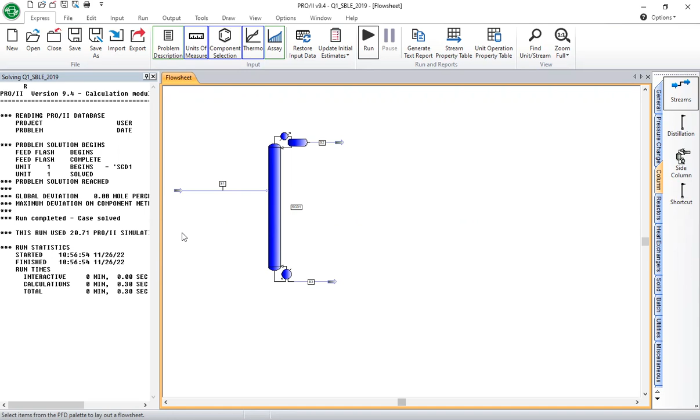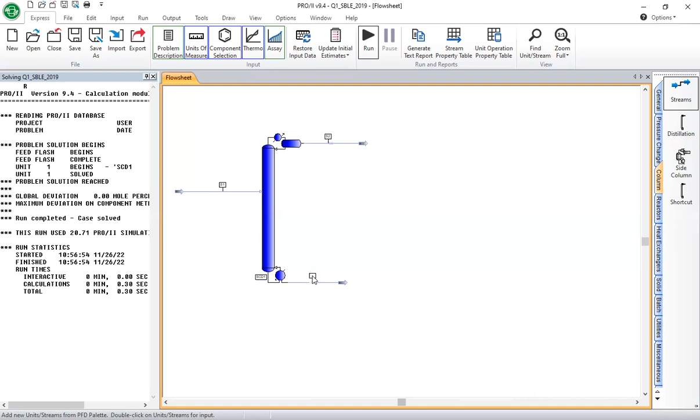So first, let me maximize this so that you can actually see this properly. Let me keep it straight. So what is happening here, I have given a stream here. So this is methanol water. Okay, let me change the units to kgs per hour. Let me actually show you another screen also here where you can see the problem.

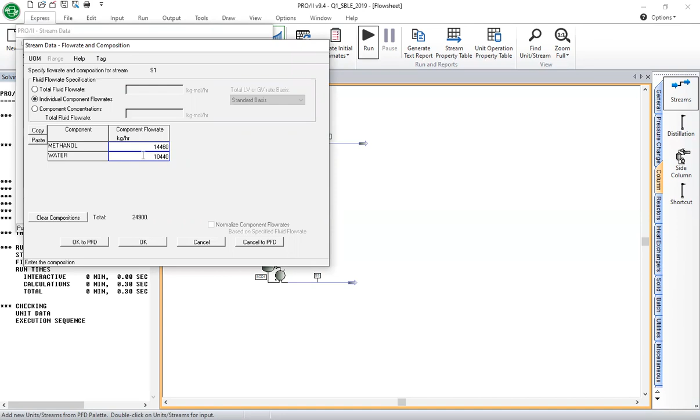So double click here and then flow rate and composition is methanol 14,460 and water 10,440 kgs per hour. This is what I have entered as the inputs. And temperature, it said it is entered as subcooled liquid. So temperature I am taking as 20 degrees centigrade. So 20 plus 273 comes to 293 Kelvin.

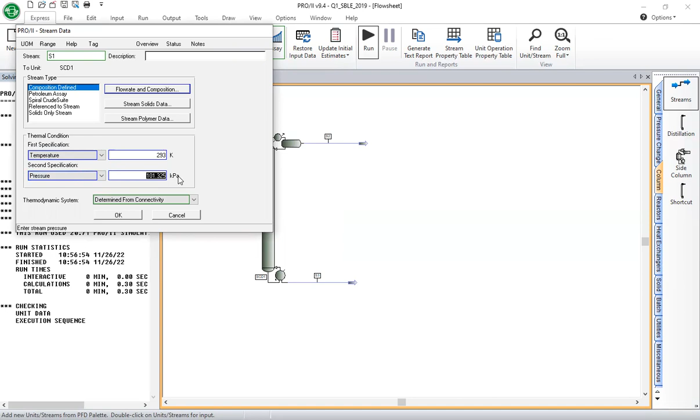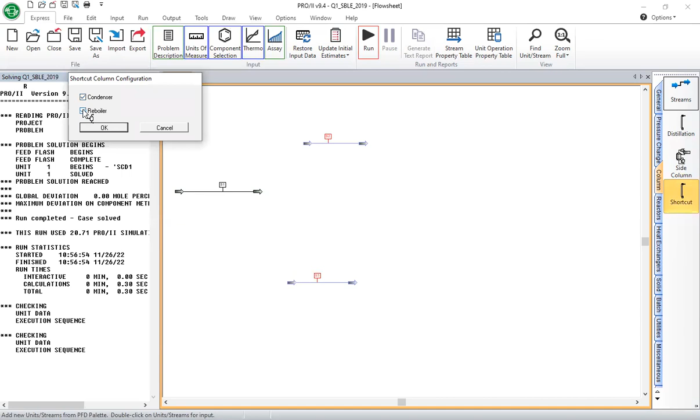So pressure is 1 atmosphere. 1 atmosphere is equal to 101.325 kilopascals. So this is my feed condition, S1. And then I jump into the shortcut distillation column. But I will show you again how to actually do it. So I've removed it. Take the shortcut distillation column and place it here. It will ask whether you require a condenser or a reboiler. If you are not taking a condenser and reboiler, it will act as an absorber.

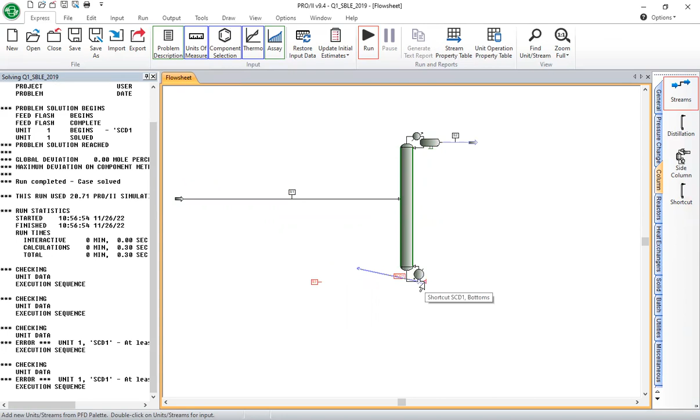Okay. Now I will connect this feed stream at the center, and then this stream to this particular outlet, and this stream at the bottom. So one caution is very important here. While connecting the stream at the top of the distillation column, that means condenser, you should be careful, because this green color is shown as water, but instead you should take this red color, which is actually a liquid.

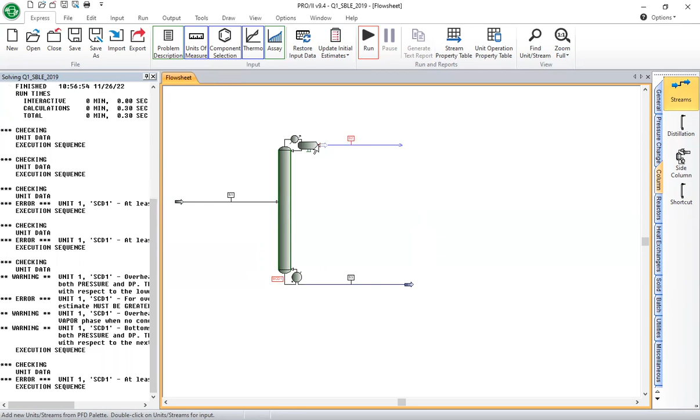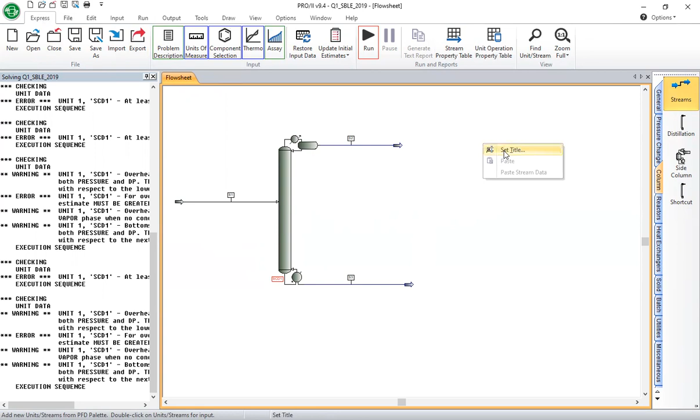We are not interested in the separation of the water, but rather in the separation of the methanol. In this scenario, we are looking at methanol and water. So this is a methanol and water problem. So methanol is the low boiling liquid and water is a high boiling liquid. And you can see the name of the module is given as SCD1, that means shortcut distillation column 1.

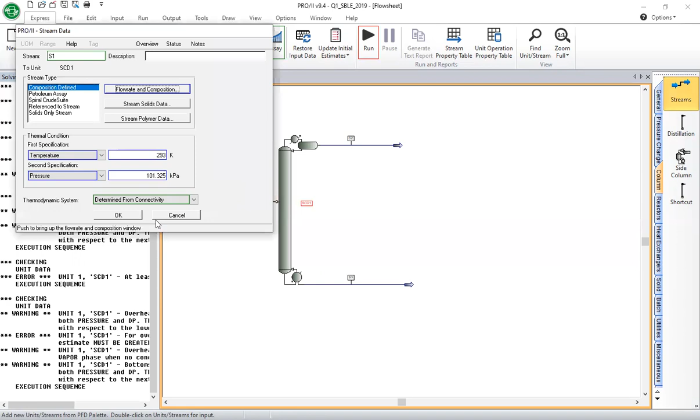Now we have to enter. I have already entered the details here. Flow rate: I have chosen not the total, but individual component flow rates. Methanol is 14,460 and water is 10,440. Okay, done. Now let me open the shortcut distillation because this is also red. Condenser and reboiler already set. So it is given as bubble, that means it is a total condenser.

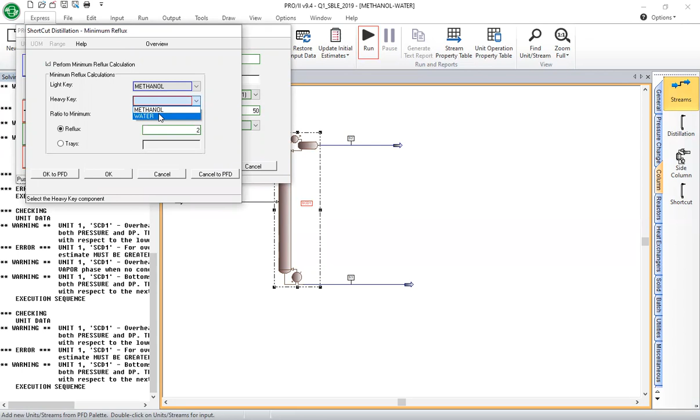Now I go to minimum reflux ratio. Light key, which is more volatile, I consider as methanol, and heavy key as water. Now R to R minimum reflux ratio, by a design thumb rule, is around 1.8 to 2.5. Let me consider it as 2. Now there are still red specifications: product specifications.

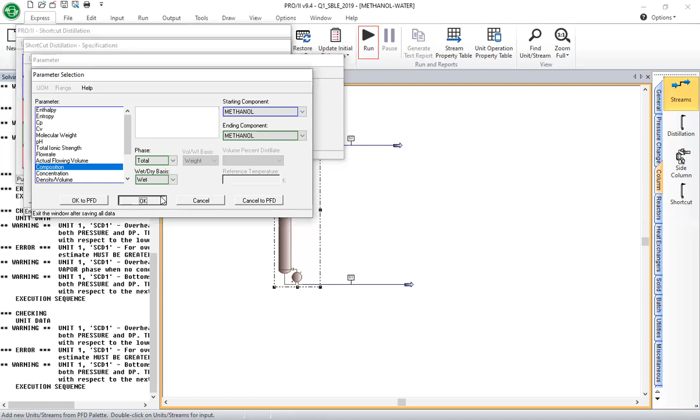The top product is stream S2. I want the methanol composition to be 0.99, that means 99%. At the same time, the bottom stream is S3. In S3 I want methanol to be very less, so I consider it around 0.1, that means 10%.

So products: F is equal to D plus W. F is feed, D is the distillate, W is the residue. You have to specify at least one, because we know the feed composition and feed flow rate, but with one equation and two unknown variables it cannot be solved numerically.

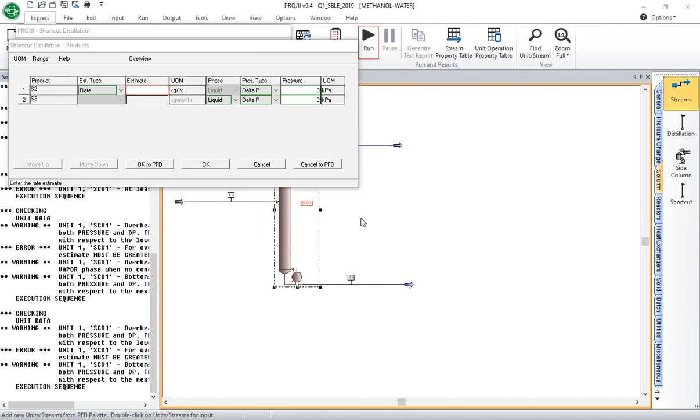So let me take it as mass. My feed contains 14,460 kg per hour methanol, and I'm saying 99%. Roughly I wish to take around 12,500 kgs per hour. This is an approximate value. All other things are blue here, and the Fenske estimates we don't have to bother with now. Now let me say okay. The input to this process flow sheet window is done.

Now let me go to the next part, the thermodynamic model. In the problem, we have to choose NRTL. First, let me delete this NRTL so that it is easy for you. Now I want to add. See, now the thermodynamic model is not there.

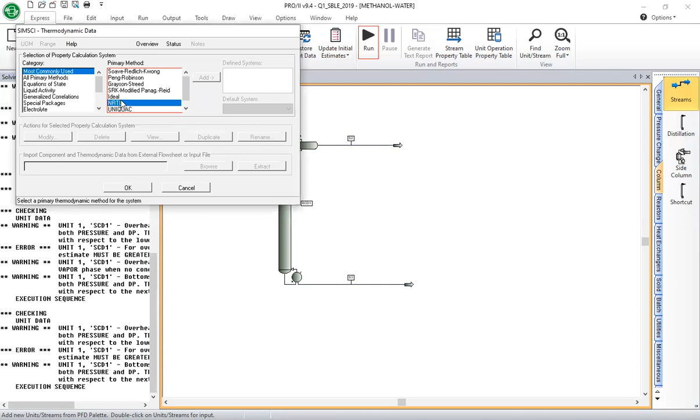Let me delete it. Delete and then okay. Now see the red color. That means the thermodynamic model is not set, because there is a water molecule. Generally we choose the most common method, NRTL, add it, then single liquid phase only, and okay. Why single liquid phase? Because methanol and water are completely soluble, so you can say single liquid phase.

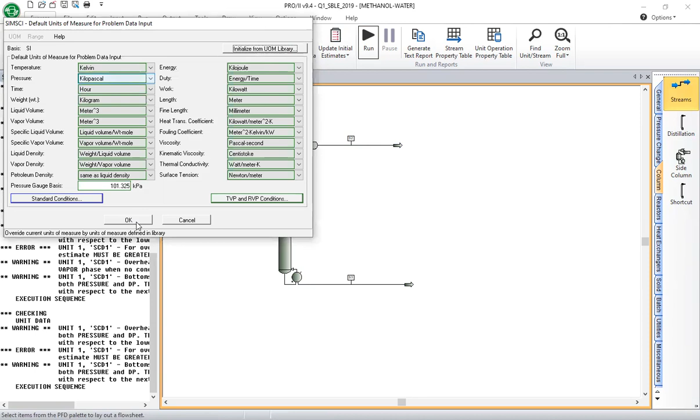Now you see here the units of measure is also very important. I have gone to the units of measure at the top, said initialize, then chose the SI metric system, and said okay. So my system is ready now. Now let me restore the data and save. Every time you change any data, please click restore input data. Otherwise, the previous results might recur and your simulation might go wrong.

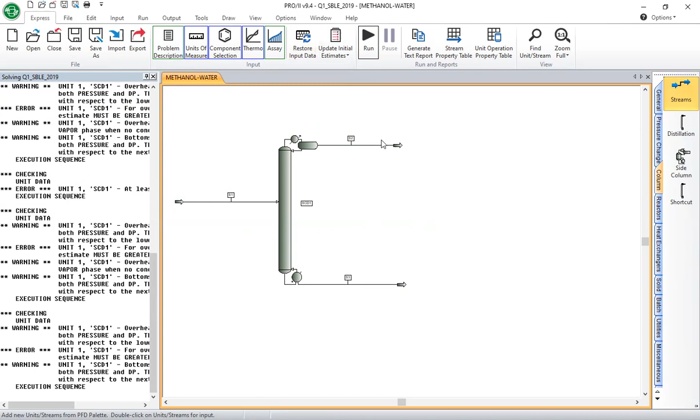Now let me go to the run button. See, now the program is run. If I'm able to see the blue color appearing in the process flow sheet window, that means every other data is correct, and my simulation is run with the given conditions. I think you are able to understand what I'm trying to say.

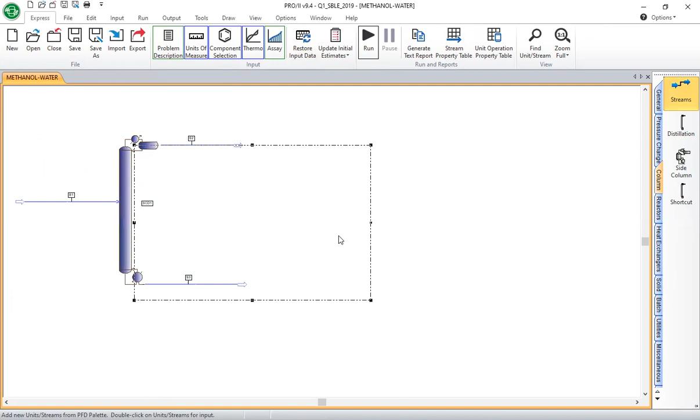Now let us see this output. S2 is the top product, S3 is the bottom product. In S2, what are my results? I said 99% is my requirement, and it has given me 0.9899. So this is the molar composition of methanol, given in kg moles per hour. But you have to check in kgs per hour also. That we have to explore. And the top temperature is also given as

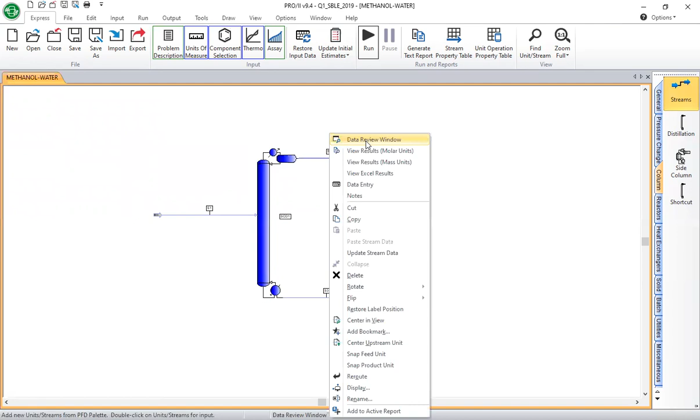337.79. If I want to look at mass results, go to output, open S2, right click and view mass results, and now you can see 12,409, and the mass composition is 99%. Molar composition similarly is 0.9899. So approximately 12,500 is coming out as total product, in which 12,409 is our methanol.

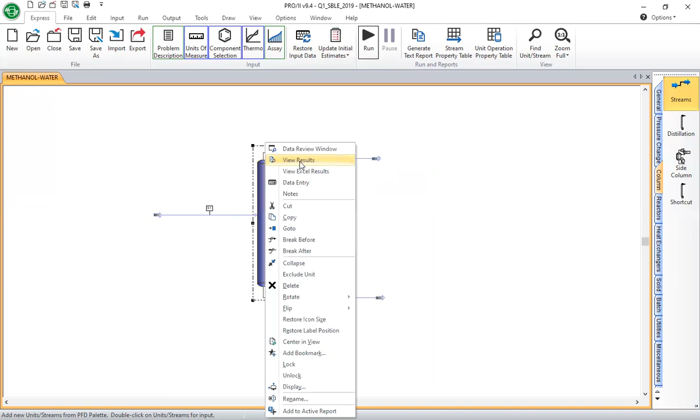But now the question is how many trays are required. If I right click on the distillation column and view results, you can see this window with the entire results of the shortcut distillation column. If I come down, you can see 8 trays, and R by R minimum. We have selected R by R minimum to be 2.5.

In that condition, what are the total trays required? 7. And the feed tray? 5.67. We cannot specify 5.67 in the rating calculations, so we approximately say it is around 6, or 5. This is the starting point we have to consider before going ahead with the simulation operation. This is the result we obtain from this shortcut

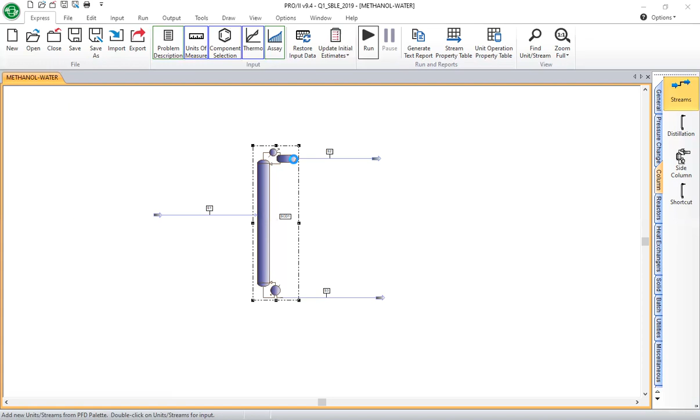distillation operation. Let us see the inputs we have specified: 14,460 methanol and 10,440 water. This is the mass composition available. Total mass entry is 24,900 kgs per hour, and temperature is 293 Kelvin. This is what we have done. I think we are done with this.

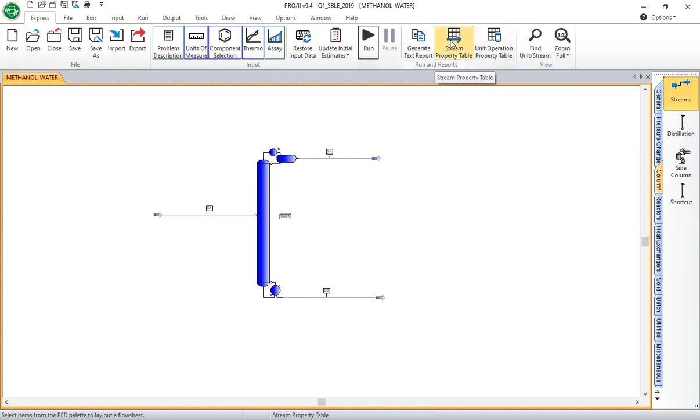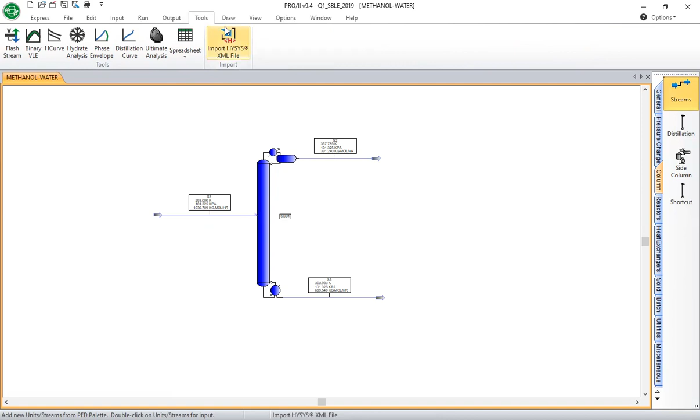Now I want a different view of the process flow sheet window. Let me go to view, and then toggle stream. This toggle stream window shows what is happening at each place. Then I want to write text. Draw, and then draw: methanol water distillation. So this is a methanol water distillation operation.

So with this I end this answer. What result have we obtained? Let us see the column and view results. Total trays are 7, and the feed tray would be 5.67 if R to R minimum is 2.5. If R to R minimum is 1.75, total trays would be 8, and the feed tray around 6.58. This is what you should report as your output, and give an analysis according to that.

This is only the shortcut distillation column; you have to achieve more and go ahead with optimization while simulating. That is how you will enhance the results. Okay.